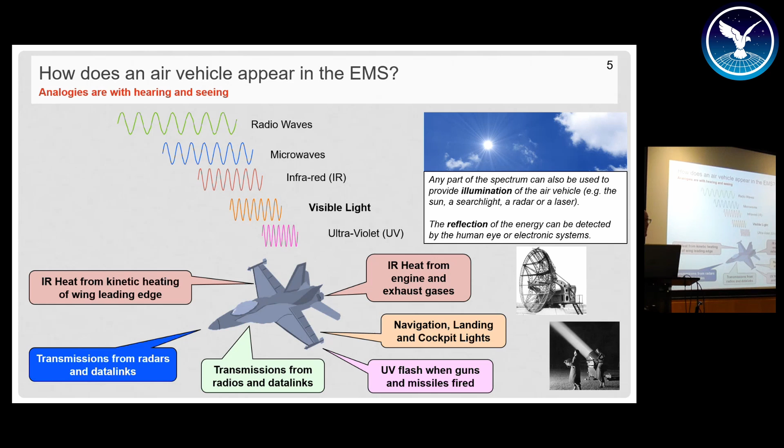The other thing you can do, and which we all do every day, is you can illuminate objects with electromagnetic energy. And the most obvious example of that is the sun, which is a big ball of electromagnetic energy illuminating everything so we can see things by the reflected light. But equally, we could see things that were reflected from searchlights or radars. So that's all I need to say about how the spectrum helps you see and hear and detect aircraft.

But stealth is the opposite of that. So in stealthy platforms like either the F117 or a B2 type platform, what you're going to try and do is reduce the signature. So you're going to try and reduce the energy that's produced by the heating, by the radars, by the radios.

And the hardest thing to get rid of is the visible light reflection. But ultimately, if you go back to night again, you can't see them. So that's stealth. It's just removing all the things in the electromagnetic spectrum that would allow you to detect it.

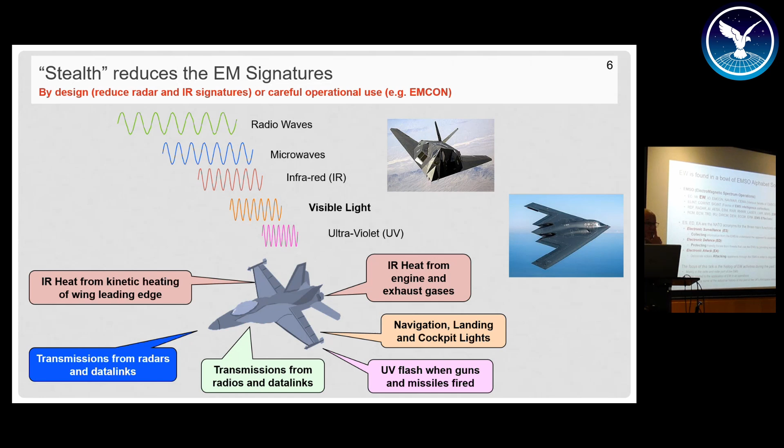You're going to try and listen or watch and see how your opponents or potential opponents are using the electromagnetic spectrum. So listening for them, what they do, collecting information.

Once you've worked out what they're doing with their electromagnetic spectrum, you want to be able to stop them doing it. So defense is ways to protect your own assets from whatever they're doing. And lastly, obviously, attack is when you deliberately do something to mess them up.

So I've got 150 years of history to cover in the remaining 54 minutes. So that doesn't give me many minutes per year. And if we invert that, it gives me quite a lot of years per minute. So we'll rattle through this.

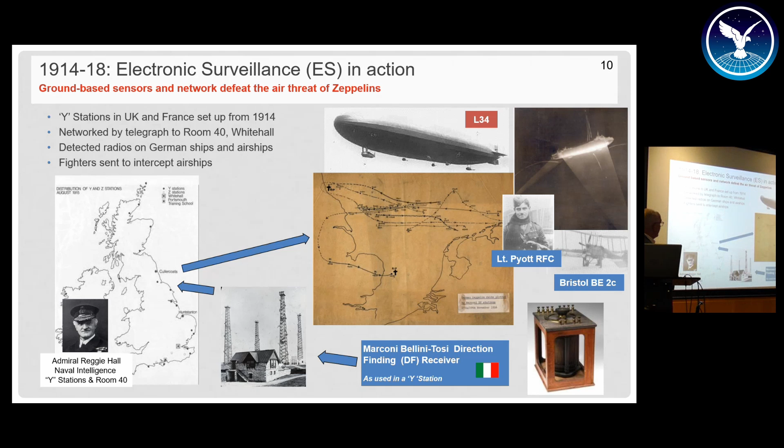By the end of the First World War, a lot of companies had started to pick up on this new EMS stuff, as well as the electrical telegraphy they were doing before. In the aerospace world, there were about 18 companies created making aircraft, and over the next 30 or so years these companies gradually coalesced. The two biggest blocks were Vickers Armstrong and Hawker Siddeley, who kept making aircraft under their brand names but were single companies, and there were a few smaller companies.

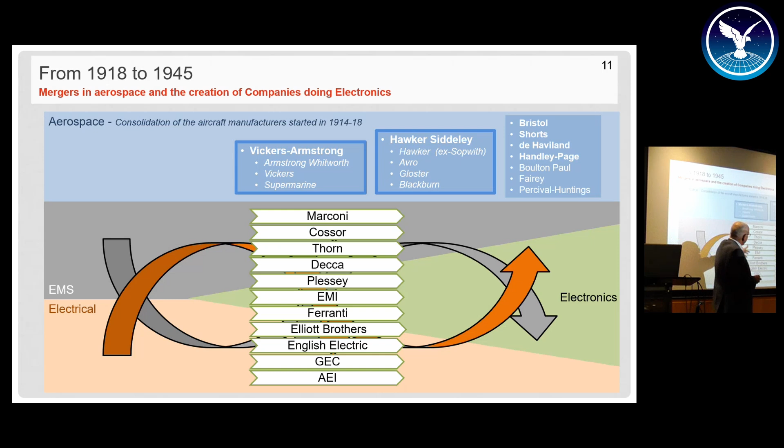The other thing to notice is all these companies start to mix up electrical and EMS. So there's radios and other stuff coming along through here, and it's really electronics. By the Second World War, the electronics have gone mad. In the next 6 years, things of all flavors are created to do navigation, sensing, jamming, networks, communications. It's described in British histories as a war in the ether - the idea that electromagnetic signals are somehow carried by something, which was the ether, which was later proved to not really exist.

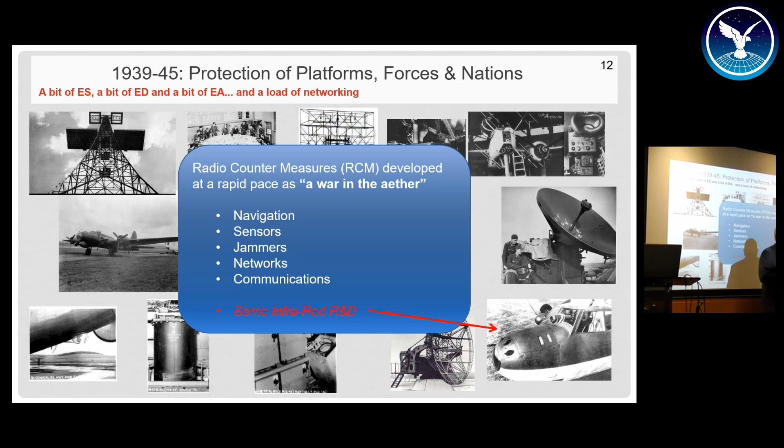Now, all of those are radio or radio frequency, except for this little one down here, which I won't talk about tonight, other than to say, if you're interested, go and look up Spanneranlage, which is an infrared searchlight and detector system which the Germans tried on a number of their night fighters.

But we're going to focus on radar. And of course, the main radar in the world, the first one ever, was the chain home system. It's not true, but it makes a good story, right? Britain was the first to deploy a network of radars to protect the nation. And this is chain home in its full configuration.

So the chain home radio direction finding - the code name for it - had 2 or 3 transmitter towers. On these, they had antennas that would transmit, and you could have multiple frequencies - these are the 50 megahertz frequency towers. In between the towers, they would hang an array of metal wires to make a big sort of curtain antenna, probably as big as this room, which would be used at the lower 20 megahertz frequency.

You might wonder why there's a picture of Dover Castle. I was at school at Dover. I used to do dinghy sailing in the harbour, and I was terribly into fortifications. You may have seen that before. I used to love looking at Roman stuff and Iron Age stuff and Saxon stuff. And I'm always a bit curious about what these were.

My dad, who was in this whole business, was a British Army Royal Signals officer, as indeed was my grandfather and my great-grandfather before, although they were Royal Engineers. He told me what those were, and it started me thinking.

So anyway, the first 20 chain home stations were deployed. They were out and in use during 1939. The receiver elements of it, which is these 4 towers here, look very familiar because they're the same type of things as were used in the First World War. They were made by Cossor, and the engineer in charge of that was Leslie Bedford, which I'm not sure all of you would know. So that bit there is definitely a reminder of why we're here tonight.

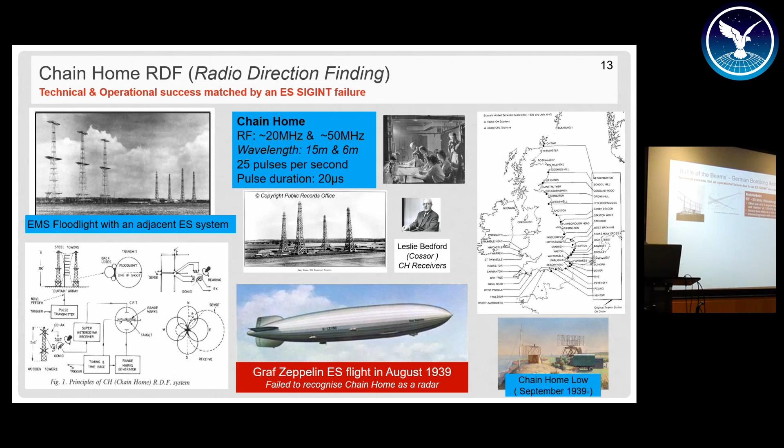If the Germans had heard those and detected those, they would have gone, those are radars. Why didn't they? Because the frequencies that Chain Home were using were very close to the frequencies the Germans were already planning to use for their bombing aids.

Each one of these produced two relatively small beams, and one of the beams went beep, beep, beep, beep, beep, and the other one went beep, beep, beep. So if you flew into this beam with your receiver listening, if you were one side of it, you'd hear beep, beep, beep, beep, beep, and if you were on the other side, you'd hear beep, beep, beep. But if you were right in the middle, the two joined, and you heard a steady beep.

So the German bombers just had to fly into one beam, fly down it, and when they heard the other beam, they pressed the bomb release button. That was Knickebein, which was fairly quickly discovered. Then they came up with two more versions, which just had more beams and more clever modulations.

Problem was, people had been talking about it - German pilots were talking about it after they'd been captured, and there were some intelligence reports. R.V. Jones, another one of the great heroes of this world, ran a small department that was so small it was just him. Winston Churchill and Lindemann had said, just do whatever you can to work out what they're doing with the science.

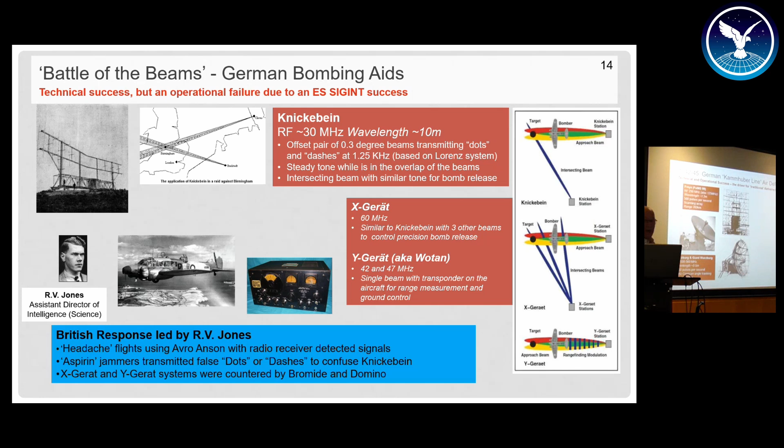And that's really, I think, why the Germans hadn't spotted what Chain Home was early on in the war, because they were really way ahead in this sort of technology. And their radars look much more like radars.

They deployed a surveillance radar called Freya, a standard sort of mesh grid thing that rotated. You can see it's got a much higher frequency - it fires 500 pulses compared to the 20 odd.

They also had ones that look like these, which look like pretty ordinary radars to you, called Würzburg, and the bigger version, Giant Würzburg. These were deployed in a thing called the Kammhuber Line.

The way it worked was a Freya would have under its command a few guns, a few searchlights, and a pair of Würzburgs. When they found a bomber, they would pick one bomber - they would tell one of the Würzburgs to track the bomber, and the second Würzburg would track a night fighter, which was flying above a beacon.

On the ground, they would issue commands to the night fighter to steer it towards the bomber. On the night fighter, there would be a small radar system, which they deployed by then. The final part of the engagement would be by radar control and visual at the very end. They did add some other stuff - if you're really interested, go and look up a thing called Kleiner Heidelberg, which is a fascinating device.

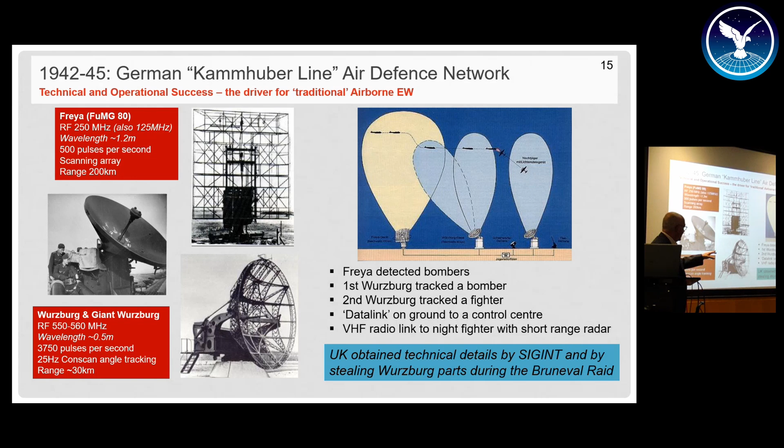The UK obtained technical details by listening through ferret flights, and in the Bruneval raid they actually stole parts of the Würzburg radar to work out its frequencies. As a result, they were able to get a lot of equipment built quite quickly.

They could only get hold of some old aircraft to start with, like the Boulton Paul Defiant, a turret fighter that didn't do a fantastic job, but because it had power, they wanted to put an early jammer called Mandrel on it, which could jam Freya just where it was scanning.

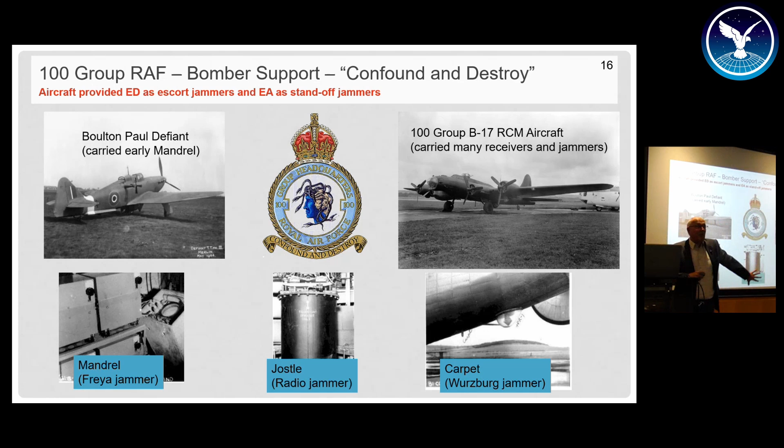So instead of Freya detecting anything, there'd just be noise. They were then moved into bigger aircraft - Britain got hold of B-17s and B-24s, which had a lot of power on board. 100 Group was set up with its motto, confound and destroy. Gradually these aircraft were equipped with about 10 or 15 different types of jammers - one to deal with Freya, another family for Würzburgs, and a lot of radio jammers to try and blot out or confuse communication with the night fighters.

But in fact, the most successful of all the countermeasures was a thing called Window, nowadays known as chaff. Joan Curran, a physicist at TRE Great Malvern, previously part of the British defence research establishment, now one of QinetiQ's bases, realised what could be done to the radars with just pieces of tinfoil.

So they started to cut out pieces of tinfoil about half a wavelength long. They could chuck out hundreds of strips of tinfoil and create an echo that was way bigger than any of the aircraft would have produced.

So every night, bombers would fly along dropping piles of tinfoil, which by the time it got to a Freya radar screen would look like this - the whole screen covered with loads of echoes being produced by these piles of tinfoil. The Kammhuber Line just fell to pieces. The idea that you had one radar to find something, another to track one thing, another to track another thing, plus jamming of all the radio communication - it just collapsed.

But the Germans had actually already got one called Düppel that they tried themselves, so they kind of knew what might happen. They didn't realize how bad it was going to be, but they worked out they could do different things.

So they changed the frequencies of the radars. That meant you had to change the size of the metal foil you were dropping, and you changed the jammer frequencies. Basically during the war, the cycle time of every response and counter was about 3 months or less. We can see one example of this with the German night fighter radars, the Lichtenstein.

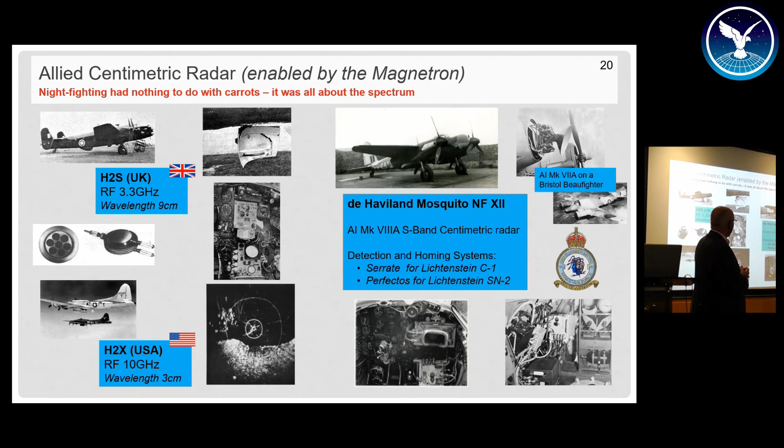As a result of that, lots of German pilots switched off all their sort of navigation aids, and a lot of them would crash on landing. So you didn't have to shoot them all down.

But the Germans were still shooting down bombers. They rescued a magnetron, worked out what it was, and actually realized that because the wavelength was much smaller, they could build much smaller radar warning and homing receivers.

And this is Naxos. Naxos has 4 antennas. Actually, it was two spinning, and these spun on a motor. And as they went round, they produced blips, and these blips were where H2S or H2X type signals were received.

And it was so small you could put it on a single-seater plane, so not a night fighter. This is the Messerschmitt 109. There's the Naxos up there, and these guys were just sent up a bit like pilots in the First World War. They were told there are bombers up there, and so they would take off at night, fly. They had no real night navigation systems or anything. They just had to follow bombers and then tune onto their beacon and come home.

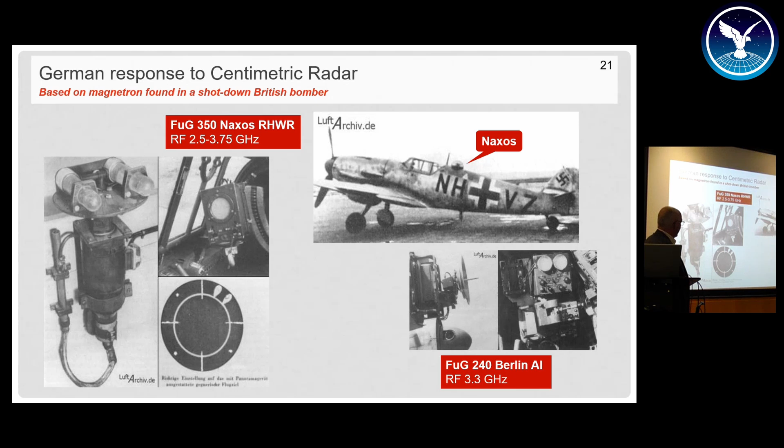They also tried to build a centimetric radar, but didn't get there in time.

The other part of what was going on in the Second World War with the Germans, who technologically were doing a lot of clever things, was they realized they were running out of pilots and aircraft, and were trying to make things cheaper. They thought, what happens if we use guided, unmanned, or uninhabited devices? They started to build a family of surface-to-air missiles. There are about 3 or 4 others I haven't shown here. Rheintochter I've picked because it's the one that was probably closest to being a success.

It was a command-guided surface-to-air missile. That means someone on the ground looks up in the sky, sees a target, looks for a flare in the tail of this, fires it, and flies it with a joystick. You're basically looking at the flare in the back, trying to bring the flare on your missile in line with the target in the sky. If you keep that, it will hit, or the warhead can be detonated.

They realized that at longer range, this technique was quite difficult to bring the missile and aircraft together. So they started playing around on Enzian with infrared terminal homing. In the nose of these, they were planning to put a little infrared camera so they could look for heat from engines and the like.

Neither of these were fully deployed, but the scientists were around, and you may know that at the end of the Second World War there was a mad, frantic rush to get German scientists, with the Americans and the Russians, and the British to a lesser extent, going crazy to catch and find these guys and offer them lucrative contracts. As a result, we see that the first Russian surface-to-air missile, S-25, and the first American one, Nike Ajax, look remarkably similar, probably based fairly heavily on the same design team. And if you look at Britain's first one, Fairey Stooge, at the Radlett Air Show of 1947, it looks remarkably like an Enzian.

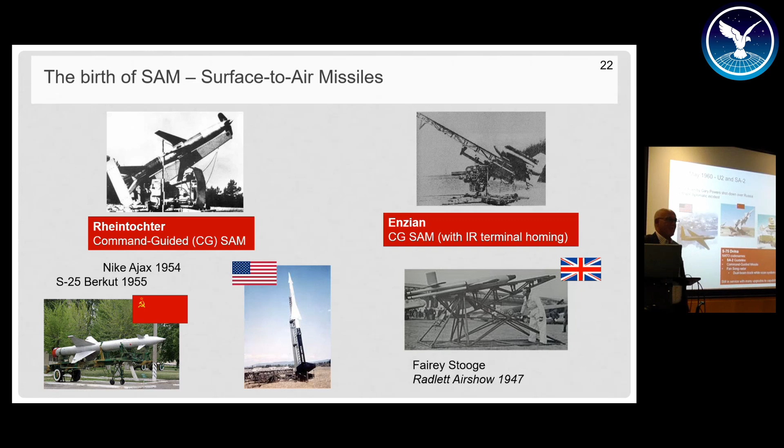But these SAMs, as I'm going to call them, people probably thought were a bit of a novelty. They weren't convinced by them. There was talk about doing things like putting nuclear warheads on them, so if a bomber formation came over, you didn't have to be too careful - you just lob the nuclear weapon up there.

But the first time people began to take surface-to-air missiles seriously was when a U-2 was shot down over Russia in May 1960. It was shot down by the S-75 Dvina, otherwise known as SA-2.

Bang, that came down. Everyone was really upset - it got a huge diplomatic incident. Interestingly, although this SA-2 was deployed back at the end of the 1950s, they're still in service today. There's a number of countries still using them, just with lots of upgrades.

Just before I leave this, I should say that's not actually the first shoot down. The first shoot down was kept very quiet and happened on the 7th of October 1959, when a Chinese SA-2 shot down the predecessor of a U-2, which was an RB-57. And they claim they shot down 4 more U-2s, but no one can prove that.

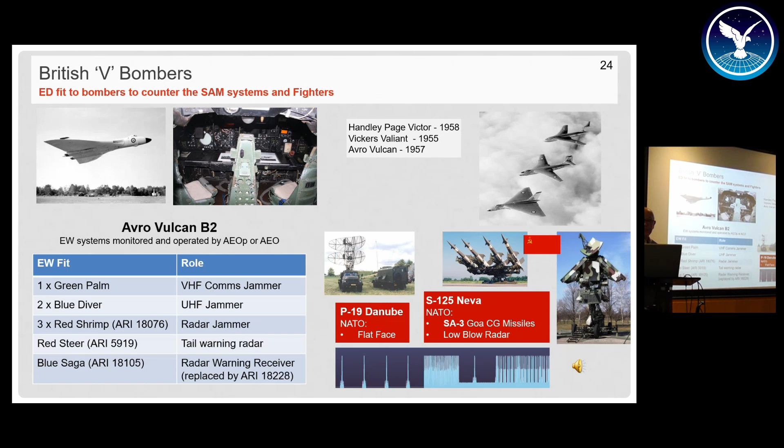Now this stuff was happening for real in Vietnam. The Americans were flying a lot of aircraft, not just B-52s but a lot of ground attack aircraft. They'd lost 2,000 aircraft over this period of time, and guess what they were coming up against again? The S-75, SA-2. At the start of the war, for every 10 missiles fired, usually one aircraft would come down. By the end of the war, it was one kill per 50 missiles. Why is that? Because basically they remembered during the Second World War that you needed radar warning receivers and jammers, and a lot of these aircraft didn't have them to start with at that time.

So they started sending a lot of aircraft out to listen for what frequencies the SA-2s were using. They were known as Blackbirds. Some of them were called Ferrets. The point about this story is that the operators of the Blackbirds were nicknamed Ravens or Crows, and Crows was the one that stuck.

In 1964, all the EW specialists in the US Air Force said we need to form some sort of body that will share EW knowledge. So they created a thing called the Association of Old Crows, AOC. That's the thing I'm currently president of in the UK. I would encourage you all to join. It's terribly cheap, and you get a really good little magazine, and there's lots of seminars and lecture type things you can get. They're mainly American focused, but they are still useful.

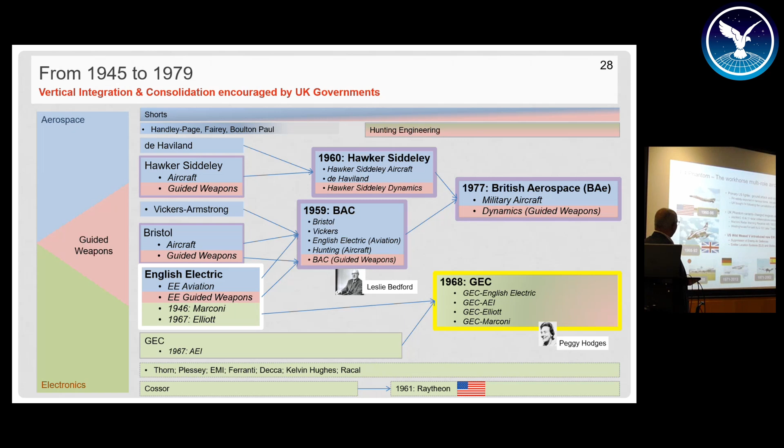A lot of those mergers were sort of being driven partially by things like Labour governments, so you often see quite a lot of the changes in the industrial landscape happen under Labour governments. So I'm looking forward to another set coming up now. Britain in the Wilson government of the mid-60s decided that we were going to buy American, and the Phantom aircraft had been produced as a multi-role aircraft that could do everything. It was a very, very effective aircraft.

So Britain decided not to buy the TSR-2, not to go ahead with buying American F-111s, and to cancel the P-1154 VTOL fighter, which was going to be a supersonic version of Harrier. The British bought the Phantom instead, but said we must have our own engines, because Rolls-Royce said we need industrial capability in Britain, and we must have our own electronics because that's national security.

So as a result, the radar in the nose became a collaboration between Westinghouse in America and Ferranti in Scotland. The Ferranti site in Scotland had been formed in 1943 to do gun sights, gyro gun sights for various kinds of fighters, whereas most of Ferranti's operations started in Manchester. The collaboration between Westinghouse and Ferranti also looked after the American jamming pod that was on this and a number of other British aircraft.

But the radar warning receiver in the tail is the 223, again designed and built down at the Stanmore site. I think we still looked after them after we moved here. There was the 223 and 228, essentially the same electronics with just variants on displays.

But more importantly for the Phantom, apart from the fact that everyone bought it, by the end of the Vietnam War, and particularly some of the lessons that also came out during Yom Kippur, there was a realization that a specialist aircraft was needed to attack radar systems. So this was to do a job called SEAD, Suppression of Enemy Air Defenses. The Wild Weasel has its own emitter location system and the Shrike anti-radar missile. It's doing a job which actually was done during the Second World War by RAF Typhoons in 1944, equipped with a simple radar homing receiver, and they would roam around over northern France, trying to shoot up Freyas and other things like that.

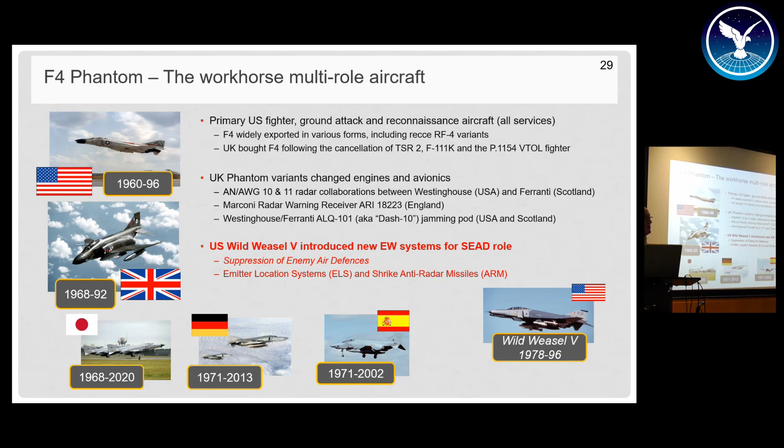Meanwhile, we've got the Harrier sitting alongside. This was just supposed to be a prototype, P1127 and Kestrel. When the 1154 was cancelled, Britain made Harrier GR1 and 3. Americans did AV-8A for their Marine Corps.

This guy had a fairly standard British fit of a Marconi ARI radar warning receiver with chaff and flares. We later upgraded that to a digital thing called Sky Guardian 200. And the Sea Harrier was created with the Ferranti Blue Fox, later Blue Vixen radar.

These are the ones that went off to the Falklands, along with a couple of Vulcans, which flew incredibly long-range missions called the Black Buck missions. They had their 18228, as you heard a bit before. Some of the ALQ-101 jammers that were normally used on Jaguars were fitted as a sort of emergency measure onto those, and they also put some Shrike anti-radiation missiles on the Vulcans. But most of the work was done by the Sea Harriers and the Harrier GR3s, neither of which had jammers.

So just to show that Britain could do it as well, there was a conversation that took place on the 6th of May at that Stanmore site, and my dad was responsible for putting a jammer together from the bits we were doing for the Sky Shadow jammer, which we'll talk about in a moment. This thing was called Blue Eric, nicknamed that. They made 9 of them in 3 weeks, sent them out down to the Falklands, where they would have done a wonderful job, except they were on board Atlantic Conveyor, which got sunk by Exocets.

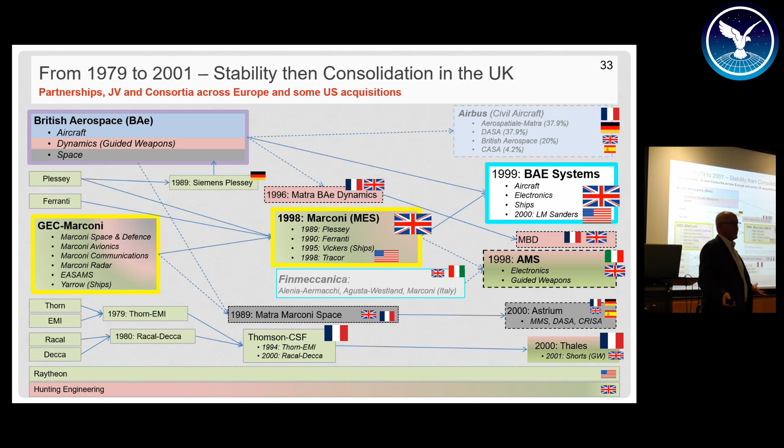Marconi starts going, we need to be in on this. They start talking to Finmeccanica, who by now have bought the Agusta Westland Helicopter Company, and a thing called AMS is created - a subsidiary of Finmeccanica in Italy and Marconi. But all of a sudden, BAE Systems say, we're going to buy Marconi. So for a short period, we have one company in Britain controlling everything in the aerospace and electronics space, apart from a bit of French stuff.

And this is also the period for the Typhoon, a multinational program creating a very capable aircraft with its very powerful radar, an infrared search and track system, and a complicated electronic warfare fit. There have been upgrade programs to make variants, and just recently the Germans have started to produce a SEAD variant they call EK - an ECR version like Tornado had.

If we look at a typical Typhoon RAF one from underneath, you can start to see where there's loads of apertures - RF and electro-optic apertures for laser warning receivers, missile warning, radars, and various ESM and jammers out on the pods. And there are flare dispensers, which can also be used to drop decoys, jamming decoys. That's the kind of underneath.

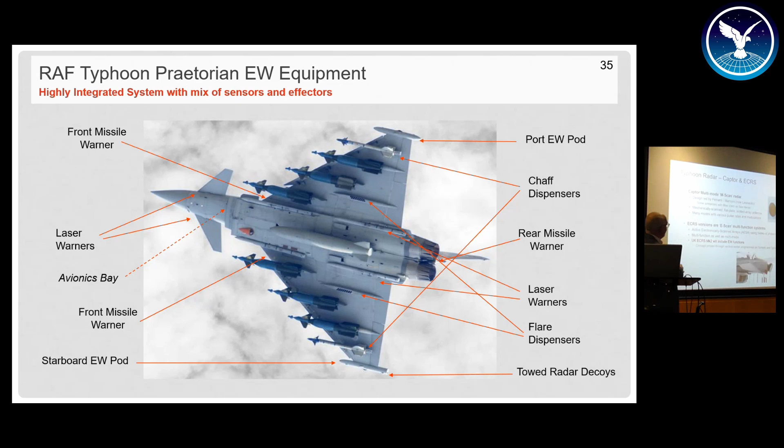In the nose, you've got the original Captor M-scan, a very, very capable radar, but it is a radar, pure and simple, really. We've always thought something could be done to make the radar a very powerful jammer or receiver. So the ECRS versions are now what are called E-scan, so they can electronically scan the beam at extremely high speed, and they can change the way the system is working. ECRS Mark II, as you've seen in the press, includes EW functions.

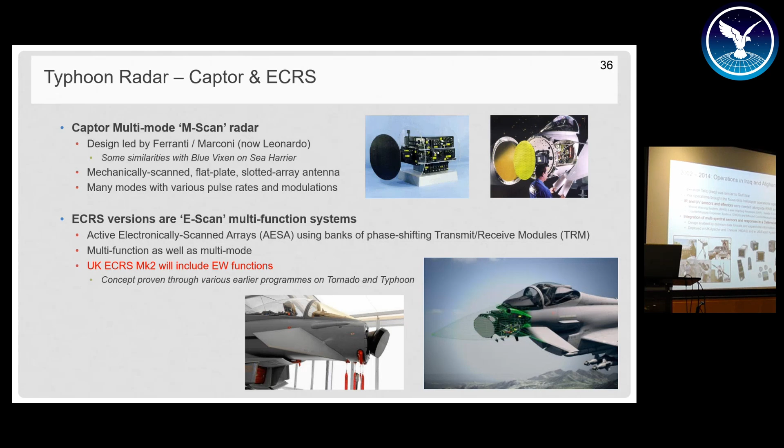But by now, the type of operations the British are involved in have changed quite dramatically, and helicopters become the primary air asset being used in operations in Iraq and Afghanistan. It was a tough time, because the things they were encountering out there were not the radar-guided surface-to-air missiles that all of the investment had been going against. What was happening was a whole range of short-range, mainly infrared surface-to-air missiles, homing on heat, probably only capable of going out 3 or 4 kilometers accurately, plus a lot of unguided rocketry and heavy machine guns.

And it meant that you needed to be looking for threats not in the radar spectrum, but now in the infrared and ultraviolet spectrum. So there was a sudden great rush and flurry of activity to make a new family of infrared and UV systems - missile warning systems, laser warning receivers, and ultimately hostile fire indicators, things that could work out that guns were firing and actually classify what type of gun it was.

New kinds of countermeasures, improved flares, and jammers operating in the infrared spectrum, things that fired laser beams back at missiles to blind the front end of the missiles. These systems were called defensive aid systems, DASs, and they go by various names. A lot of the ones that came out of this site here were on a family called HIDAS, goes on to be called CDAS and NDAS and various other names.

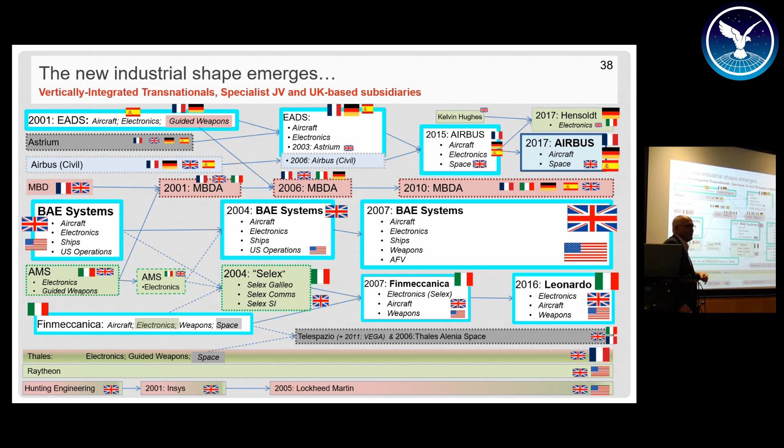This was all getting too complicated, so they just said, let's give it all up. Gradually Astrium and Airbus were absorbed into EADS, who decided Airbus was a much better name. Along the way, they created their own German electronics company again, so it all gets a bit fragmented. Meanwhile the French are still doing their stuff down here. So it gets complicated, but it's not half as complicated as what's now happening in the space where there's a huge pile of networking going on.

Everyone says the answer is you've got to make everything talk to everything and share data, because if you can have information sharing to everybody, 'power to the edge' was a phrase, then everyone will know what's happening. This is like being in a business and being sent every single email that's being sent to every person. You certainly will know what everyone is doing, or you might just end up not knowing what anyone's doing.

Shared situation awareness allows self-synchronization. You don't need any bosses anymore, you just all do what you know is right. That means things happen really quickly, and that means you've got information superiority and therefore operational advantage, so you do a lot better than anyone else. That's actually what the Americans had done in the first Gulf War and in some later operations. So it does work, but it has a tendency for bosses to feel like they're being left out, and they try and get control back. I shouldn't have said that anyway.

Key to working in a networked environment like that is a network-enabled aircraft, like the F-35, known in British service as the Lightning II. Its main driver, I think, was cost originally, but also every country was going to have a piece of the action. So you'll see most of the publicity about F-35 always say which bit is made in which country. They're forever doing deals to let a country that buys F-35 have some of the business.